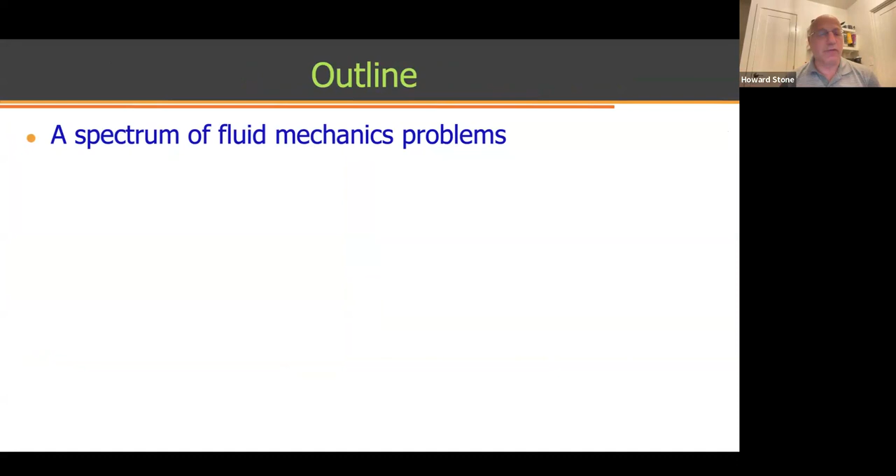So I'm going to tell you a few things about just glimpses at a couple fluid mechanics problems that we've worked on in recent years. Then I'm going to focus on some problems involving self-similarity, which is an idea I like as a sort of organizing principle to connect an experiment and a model. And at the end, if there's time, I'm going to show you a problem of surfactant spreading, which leads to an equation some of you might have seen called Burgers' equation. And again, we focused on a self-similar feature. So I'll kind of dance through some of these topics.

So to begin with, a couple fluid mechanics problems. I tell the story this way: when COVID hit in March 2020, we all went home. We were locked at home, and it turned out at about March 1st, 2020, a colleague from France had come to the United States to work with me. His name is Manu Abkarian. He's an expert on blood flow, an experimentalist.

Ten days after he arrived, he was isolated at home in Princeton with his family. And we started to talk every day. We were talking about all the reports of people getting sick in public places. And we got interested in this idea of airborne transmission. Now we know a lot about this, of course, we've all heard a lot about it.

And of course, in the fluid mechanics world, there's been a lot of work on droplets. I'm not going to say anything about droplets. I'm just going to ask the question: when you speak to someone, how much of what you speak travels far enough to cover their head if you were sitting near someone? We got permission when the university was closed to go back to the lab, and Manu in the lab started to image what happens when you speak.

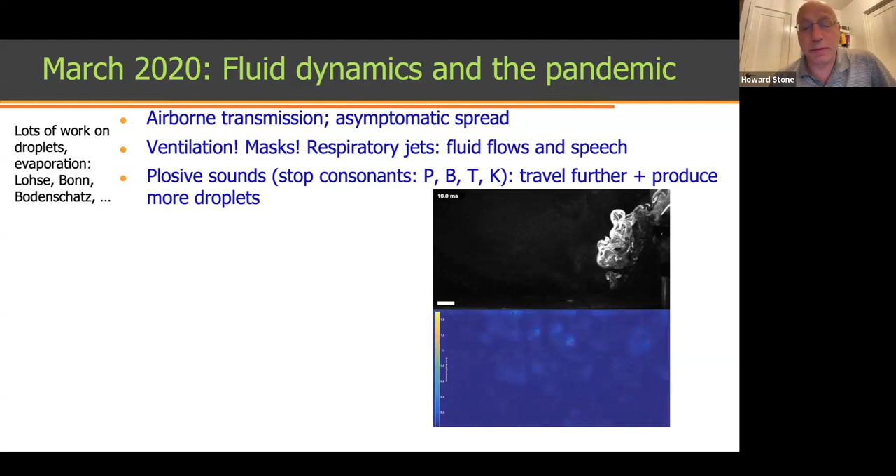You might find this interesting: the World Health Organization's social distancing guideline for more than a year was one meter. In the United States, it was 2 meters. So we ended up doing lots of studies of this, including some numerical simulations.

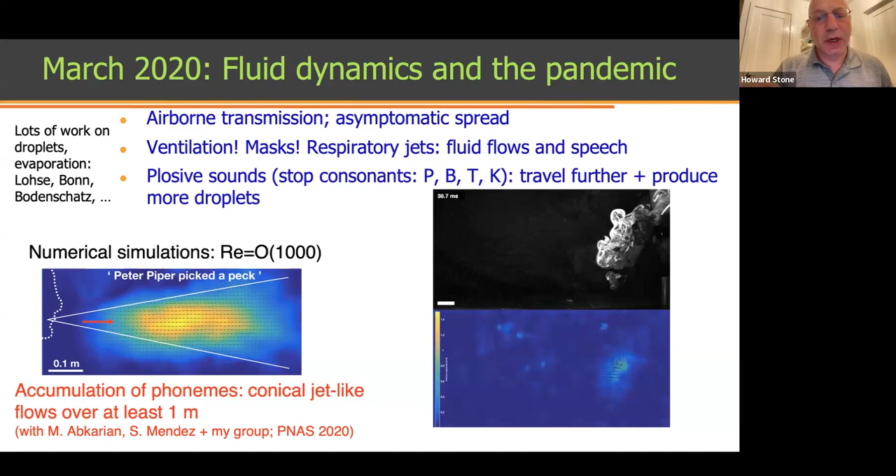We wrote a few papers on this. We also wrote about masks, not again about droplets, but about how masks change the so-called respiratory jets. And then in recent years, we've been trying to study more about the connection of fluid mechanics and speech.

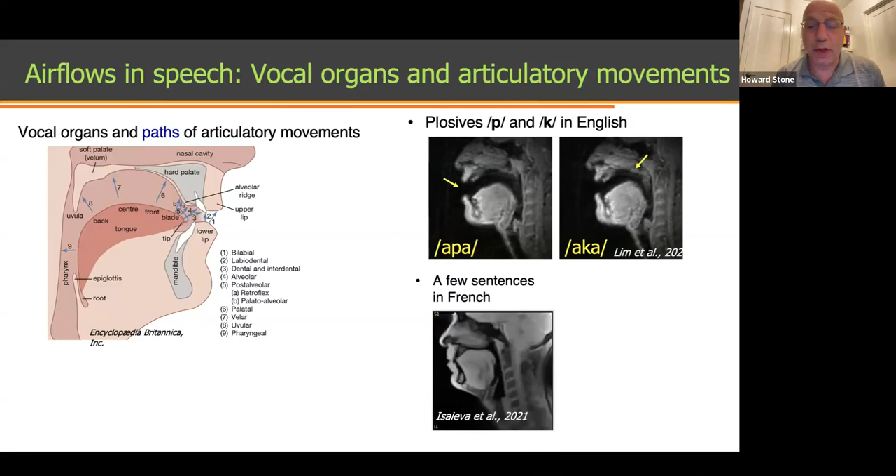In other words, how you make sounds and the airflows associated with them. In order to do this, we've looked at MRI images that show you how your tongue, jaw, lips and teeth move to control the cavity that's available for the airflow. We have looked at this. You can find this in different languages.

Because when the air leaves your mouth, your lips and teeth are like the orifice of a pipe, we've tried to understand how that changes the restrictions of the flow. The consequence of this is we tried to make a fluid mechanics-like model that links the features of language to the airflows you create in front of you, the respiratory jets.

If you're all listening, just try to do this: say the sound P, and you'll notice that when you say it, your lips are shut momentarily. What that's doing is, as you try to speak, you close your mouth, the pressure builds up in your oral cavity, and then when you open your lips, you get a very strong airflow.

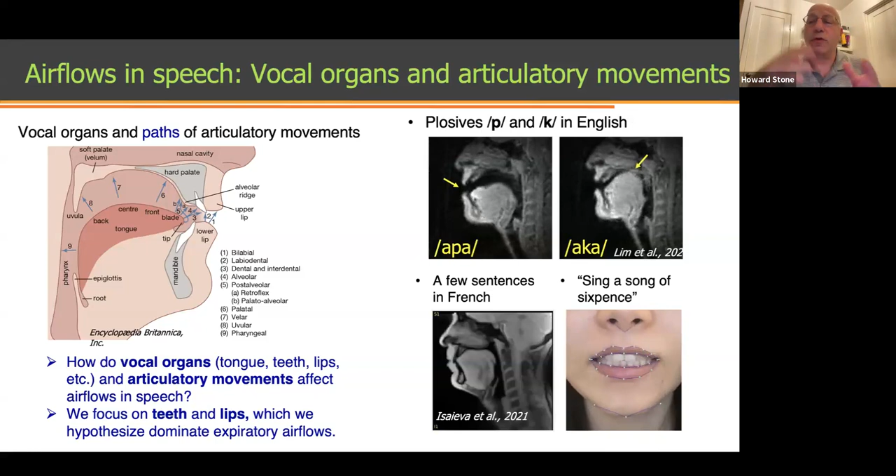So there are fluid mechanical features associated with this, and we've now coupled this to a Navier-Stokes solver. If you look in the lower right, we have a model of your teeth and lips moving. That's the cavity, that's the orifice of the cavity.

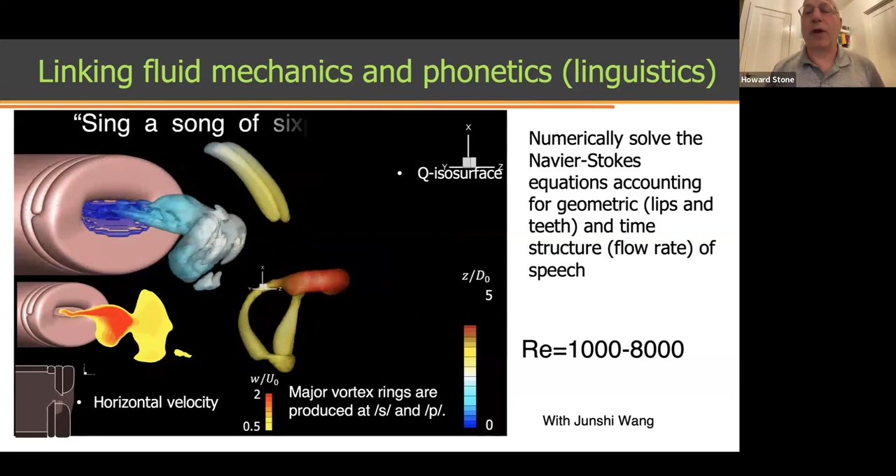We measure the airflow experimentally in the lab associated with different phrases, and then we couple the airflow as the input to a Navier-Stokes solver, color-coded here by speed and vorticity. You can see the kind of features we're now trying to understand, to link fluid mechanics to the air around you during an ordinary conversation.

After a couple of years, we're now trying to draft a paper that tells this fluid mechanics story. Anyways, I thought you might be interested if you hadn't seen that yet.

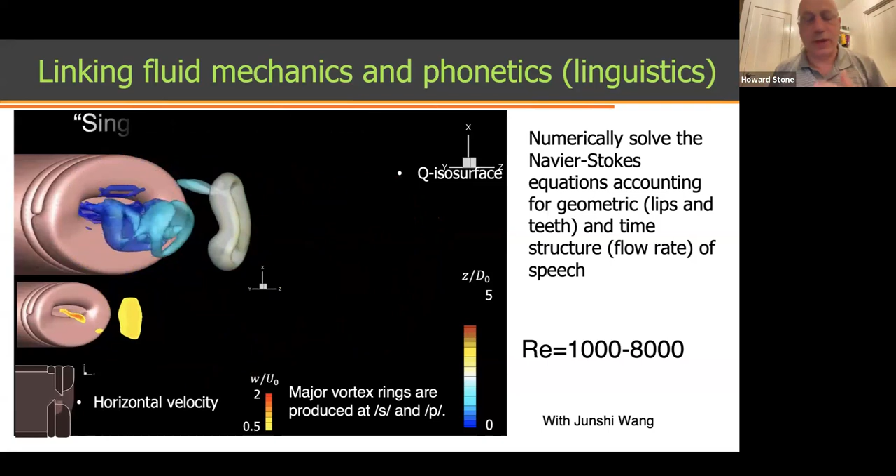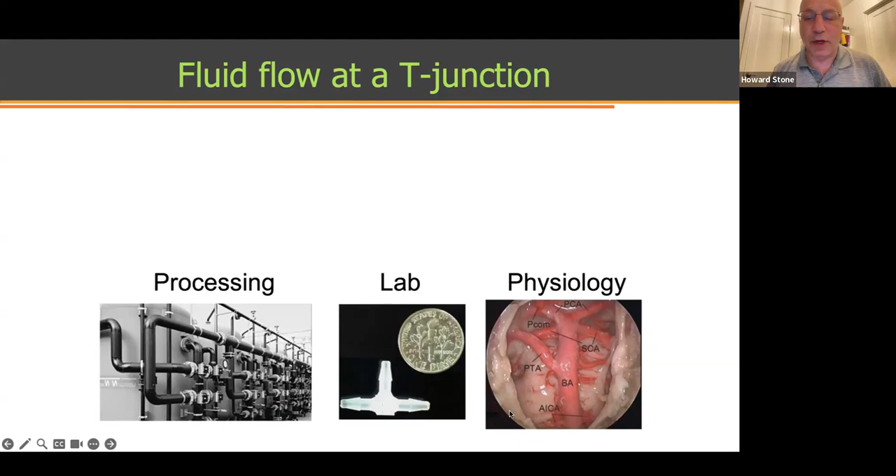So this is a fluid flow at a T-junction. At the bottom of the slide you can see different cases of a T-like shape of a pipe, whether in industrial processing, a laboratory device, or in physiology. There's lots of connectivity. I'm going to tell you about a problem where the flow comes in at the top of the T and goes out at the sides.

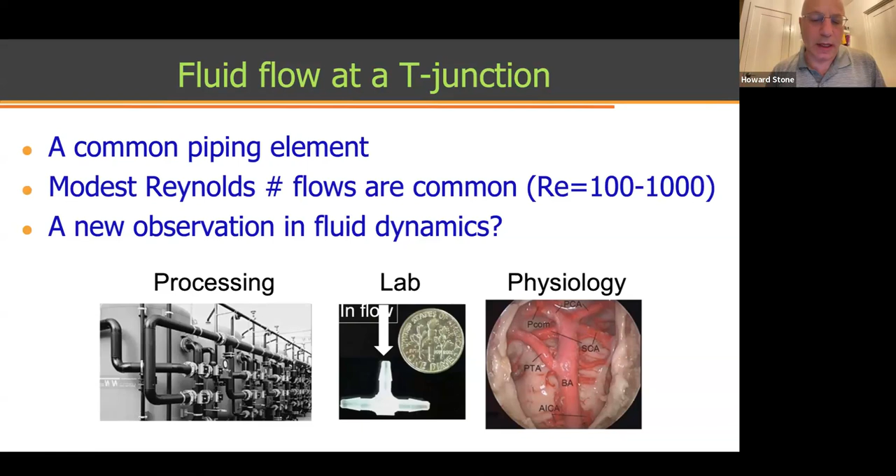The problem I'm going to tell you about has a modest Reynolds number, typically of the order of a few hundred to a few thousand. So inertia dominates, but it's not completely turbulent flow. If you teach fluid mechanics, this is chapters 6 or 7 in an undergraduate textbook - flow in pipes. Flows like this have been studied experimentally and numerically for decades, both in industry and academics. To a first approximation, I'm going to suggest that everyone missed the most interesting thing about the flow.

Now, to give you an indication about the flow, this is the experimental configuration we were first studying. It's a T-like shape with flow in at the top and out at the sides. The Reynolds number is defined just like you'd ordinarily define it. If you do this kind of experiment and study small glass beads in a fluid like water, nothing terribly interesting happens.

I should say we were first doing this because a colleague was interested in how much energy a particle would hit the wall with, and whether it might damage an oxide layer on a pipe, for example.

But what you see is the particles come in at the top, they leave at the sides. They typically overshoot streamlines because they have a different density than the fluid, and they have a somewhat complicated trajectory, but not too complicated.

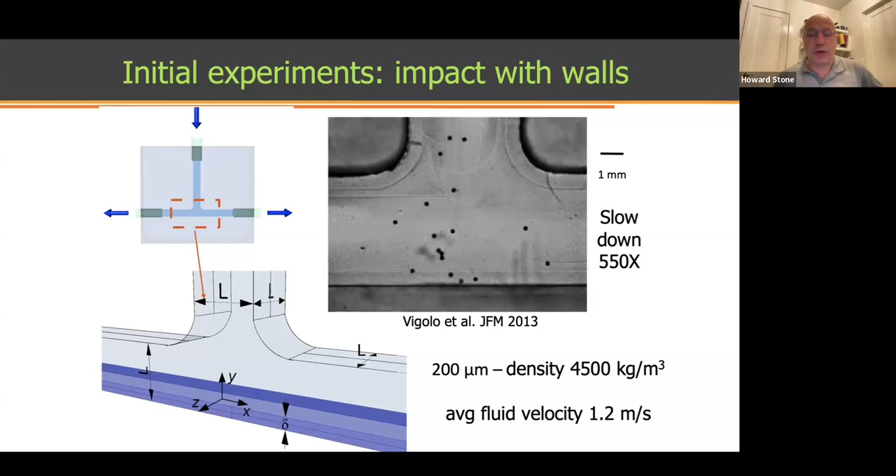And one day when we were doing this experiment, air got trapped in the flow. So I'm now going to show you what I believe had never been observed in the fluid mechanics literature before for this configuration. All the dots are gas bubbles.

They're obviously less dense than water. The orientation of the pipe, though, doesn't matter. Gravity plays no role in this effect, but density difference does. And in this case, the flow comes in at the top and out at the sides.

And when you film this with a high-speed video, what you'll start to observe is that bubbles are accumulating in the middle of the pipe.

If you ever tried to sketch this flow, and someone were to ask you, what do you think the streamline structure is? Are the streamlines a stable or an unstable kind of configuration from the standpoint of nonlinear dynamics? Most people would say, well, since everything is going away from the middle, shouldn't the middle be an unstable stagnation point?

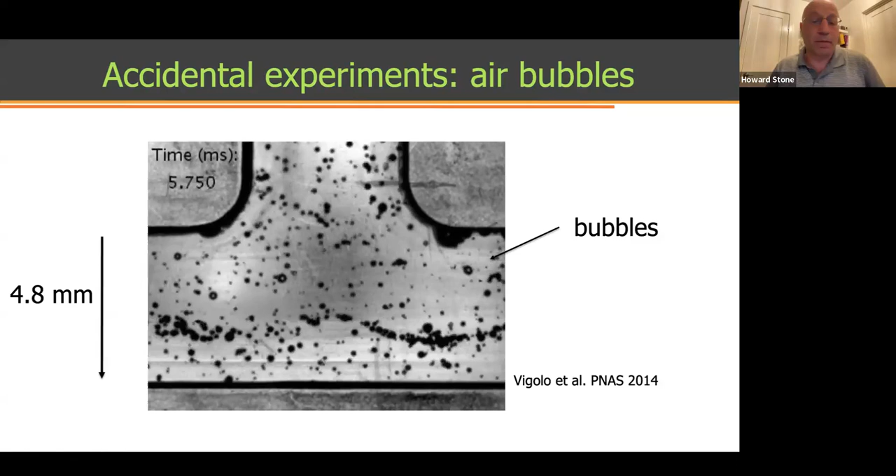That's a reasonable thought, but you can see in the experiment, at least when the Reynolds number, which here is a few hundred, I think around 500, something's causing the bubbles to accumulate. So that's the story I'm now going to briefly tell you about, which we studied experimentally and numerically.

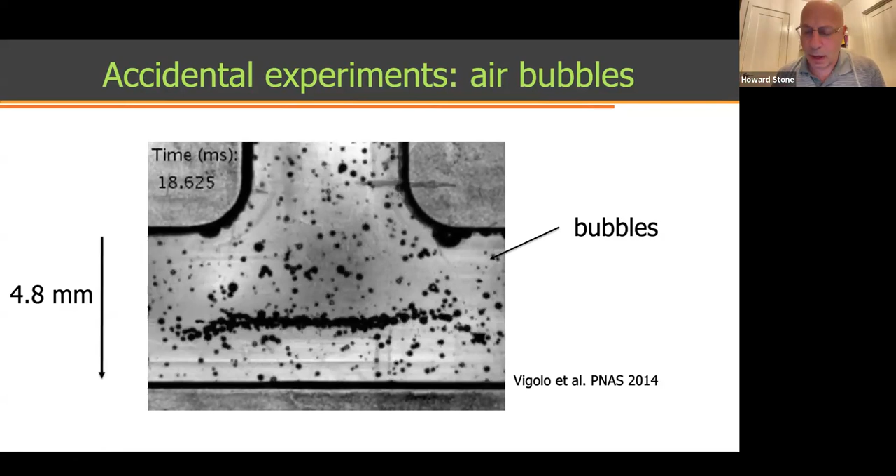If you're familiar with what's called the Dean flow, or a Gortler-like flow, when the flow has to turn a corner, it starts to generate vorticity, so the streamlines start to curve. And they get progressively more complicated as the Reynolds number increases.

Okay, so now you can explain one thing about the movie I just showed. Because you have vorticity, if you study turbulence, you know that bubbles go to the center of vortex lines. So you could imagine that if there were bubbles in this flow and you're generating vorticity, the bubbles would go to the middle.

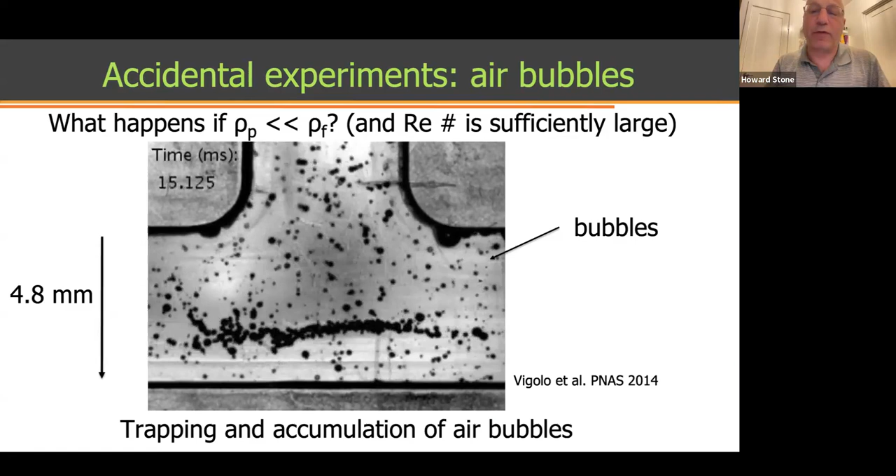So the bubbles are getting trapped in a vortex, but what's the thing that's keeping them from leaving? Why are they getting confined to the middle? That feature is because at a critical Reynolds number in this flow, the flow changes its topology like this.

In this flow, for a 90-degree angle and a square cross-section at a Reynolds number of 590, if you were to try to trace a streamline, what you discover is there's an internal stagnation point. So the flow is coming, the streamline is spinning to go out like a vortex. It reaches a finite position where the velocity is zero, and then it comes running back down the middle.

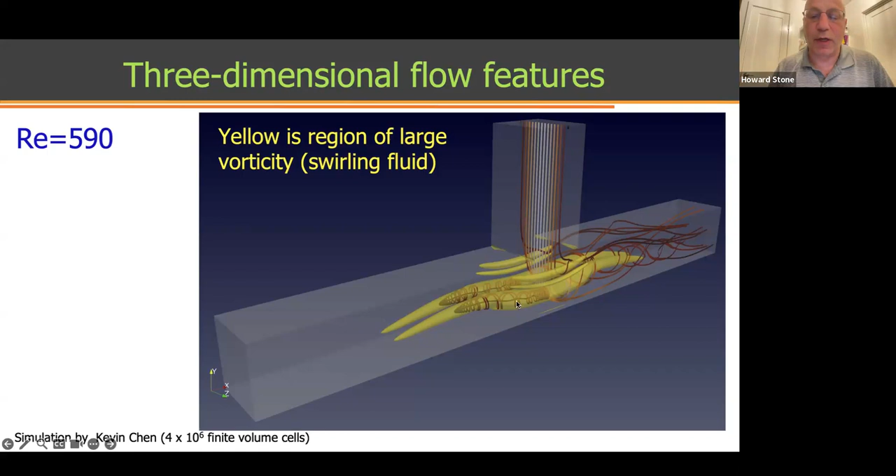In fluid mechanical terms, this feature is called vortex breakdown, and the region of trapped flow is called a vortex breakdown bubble. I could say more about how we stumbled on this, but effectively, this region of trapped streamlines is the region why bubbles are getting trapped and confined to the center of the pipe.

So long as the Reynolds number exceeds this critical number, and I believe we had kind of stumbled on this idea that you can have vortex breakdown phenomena in these confined configurations.

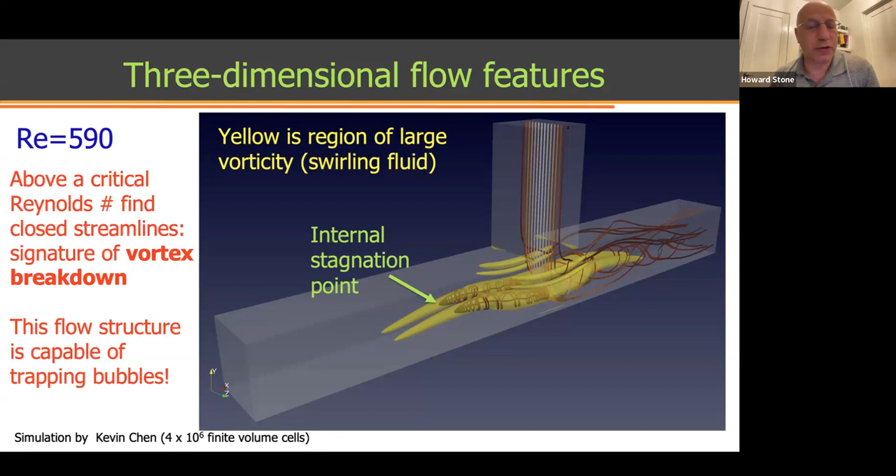To illustrate this streamline structure, I'll show you a video. We got lucky one day, and here you can see the bubbles coming in at the top. They're going out at the sides. You can see them spinning around and going out on the outside, and then you can see them running back the middle.

So this illustrates this three-dimensional flow with this vortex breakdown phenomena inside a pipe with a pretty modest Reynolds number. When the flow gets more complicated, we still see some structures of it, but the turbulence would eventually ruin it.

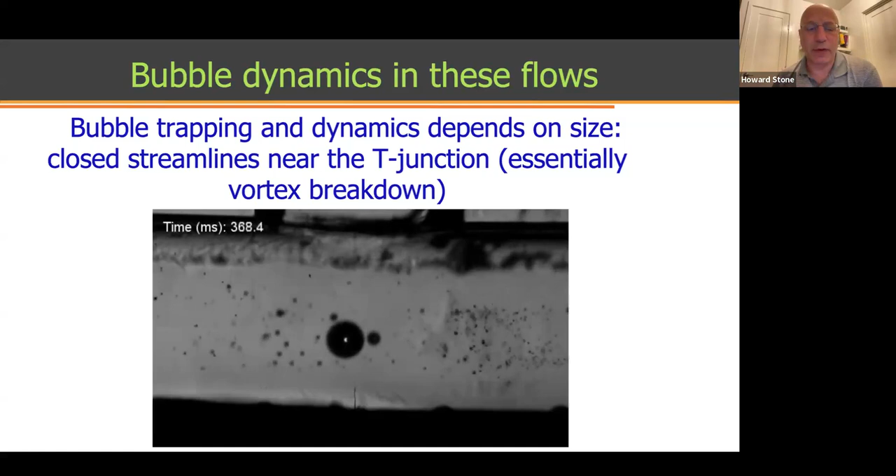Okay, so if you're paying attention, I can now ask you a quiz. Suppose I give you this geometry, but it's filled with dirty water, and I want to turn on clean water and clean out the pipe. You ask yourself, or your students, how long does it take when you turn on the pipe to clean the flow?

So anyways, we've written a number of papers on this. I freely say in public, I was never able to get a grant. I tried for four years, and I eventually turned to something else. But I always found this problem interesting, and so I like to share it with people.

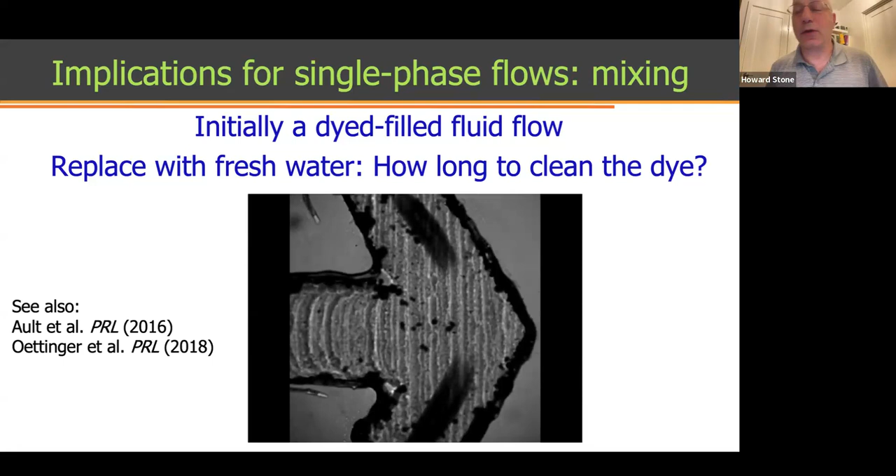Are we doing okay, Azada, Aman? Is it okay so far? Okay, no, well, at least you guys aren't asleep yet. So, okay, we're doing okay, maybe.

Okay, so the main part of the talk is I want to tell you something involving self-similarity. When you teach fluid mechanics, of course, you teach self-similarity, but you teach it in sort of model problems. So I'm going to show you how it comes up in some research problems. The first one I'm going to show you was work I did with my graduate student, Katie Wu, and Camille Duprat, who's a professor at École Polytechnique in Paris. And the paper just appeared.

If you were to ask someone, how do you think about self-similarity, if you just meet a person on the street, you might show them similar triangles and try to focus on the geometric similarity of objects.

But in fluid mechanics, the way we generally run across it, or in heat transfer, is we describe some kind of diffusion problem. Here I've just sketched, you have some concentration C, you're solving a linear diffusion equation. You imagine the concentration being some specified number C naught, say at a wall, and then it's going to diffuse into a domain with no chemical.

If I were to teach this before I did any math, I would make the sketch on the left, which is to sketch the concentration profiles at different times. And of course, self-similarity then is the idea that all these different solution curves at different times collapse to one universal curve if you plot x divided by the square root of time, or square root of dt, where d is a diffusion constant. This is the kind of thing that you teach, or you took in class when you were a student. And it has the feature that you started with a math problem with two independent variables, x and t. Self-similarity is essentially taking the so-called partial differential equation problem and making it an ordinary differential equation problem. So the first example I'm going to show you is a problem just like this with two variables, but it's a little more complicated.

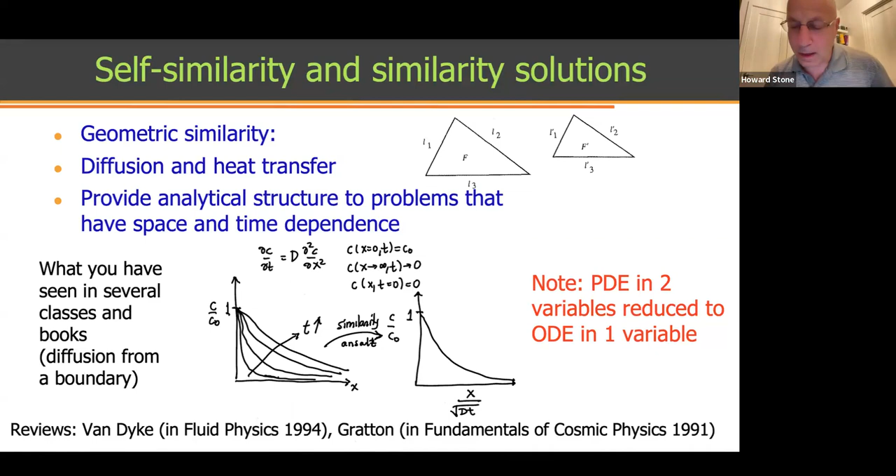Okay, so the way this comes up in fluid mechanics, and I'll show you how this comes up, at least in laminar fluid mechanics, and maybe there's examples in turbulence, is not just the linear diffusion equation, but diffusion-like equations. They involve two space derivatives on the right, but in the place of the diffusion coefficient, you can have a nonlinearity, like here, c cubed. I'm going to show you that this equation basically comes up in a large range of so-called thin film flows.

Now, if you have a diffusion-like equation, even a nonlinear one, they often allow similarity solutions. By similarity solutions, I mean that the function you're looking for is time to a power, alpha, times some function, capital C, of a ratio of two independent variables, x over t to the beta. That's sort of what you often teach.

That idea is useful if you can identify alpha and beta. Normally you need not only the equation but boundary conditions to do that. And if you succeed in this, the partial differential equation becomes a nonlinear ordinary differential equation, which you can normally solve quickly and numerically, so long as you have boundary conditions.

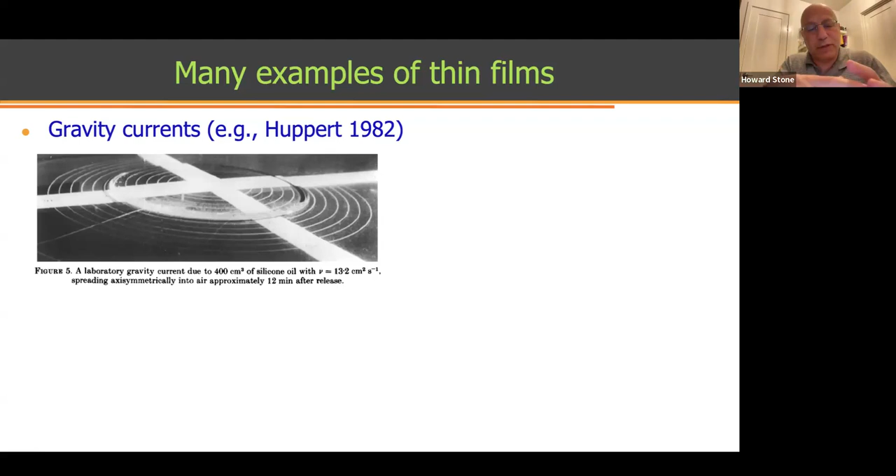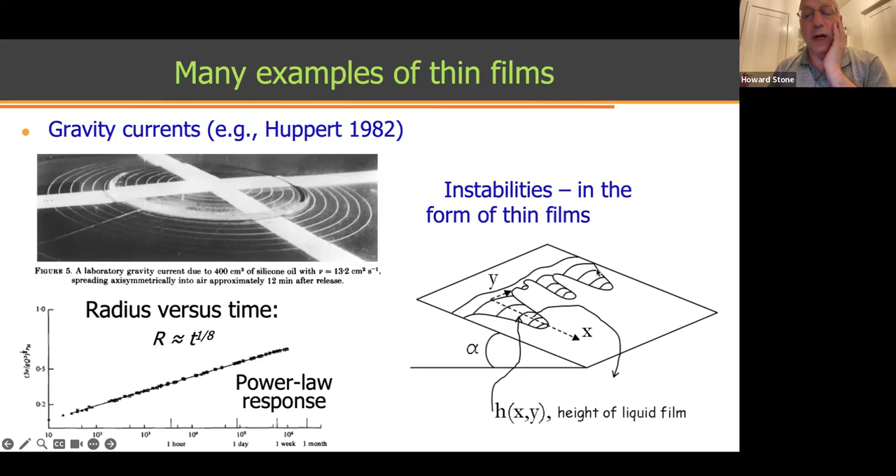There are many problems that involve thin films. They can be rivulets or whatever. So there's a wide range of examples where you see these thin film structures.

One problem I worked on a few years ago, which I liked—I didn't know much elasticity, and I wanted to learn something about it so I could do more fluid structure interaction problems. So we coupled this idea of a thin film with the most famous solid mechanics problem, the bending of a beam. Here you can see a video playing where, when the fluid loads the beam, it bends.

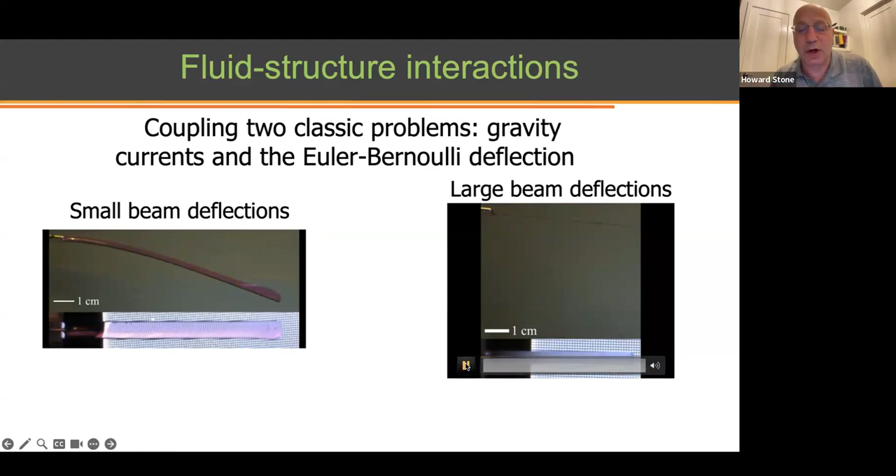There are two images here: a side view on top and a top view on the bottom. As the fluid flows, it's a so-called gravity current, like I just showed you, but its speed depends on the deflection of the beam, so these two problems are coupled. If the beam is very soft, the bending happens very rapidly, and there's a much stronger coupling of the fluid motion to the bending of the beam.

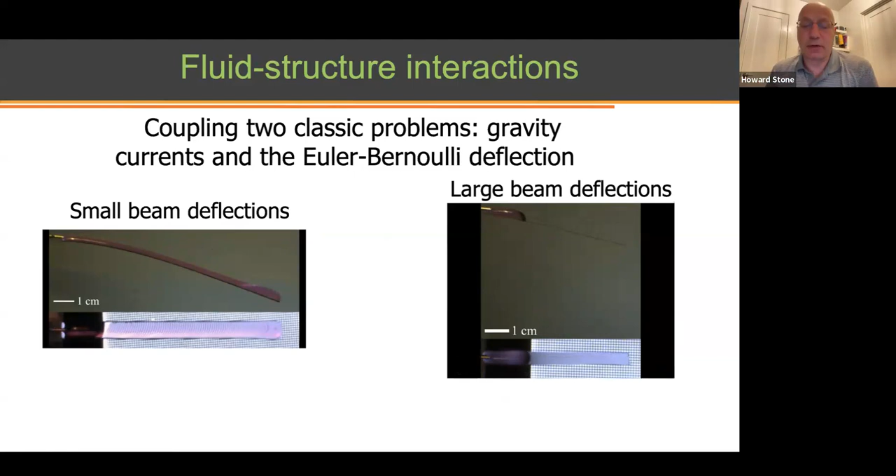I worked on this with my postdoc, Hyung-Soo Kim, and Peter Howell in Oxford then did a very beautiful analysis coupling these two problems together in a very elegant way.

So why do the Navier-Stokes equations lead to a structure you can analyze analytically? I'm going to try to show you that here. For this audience I don't have to explain the Navier-Stokes equations—I'm using U for velocity, rho for density, mu for viscosity.

Of course you could try to solve these problems numerically, but many thin film problems are moving boundary problems, so they're changing shape and might not be so simple. But when a film is thin—meaning if h is the shape function, its gradient is a small number—the shape changes, but only slowly along the flow direction.

When that's true, you don't solve the continuity equation in its normal form. You solve it almost like you do in gas dynamics, writing it as a conservation law for the height. This is an asymptotically exact description of the continuity equation, where I'm using the divergence with the perpendicular symbol to just measure variations along the flow.

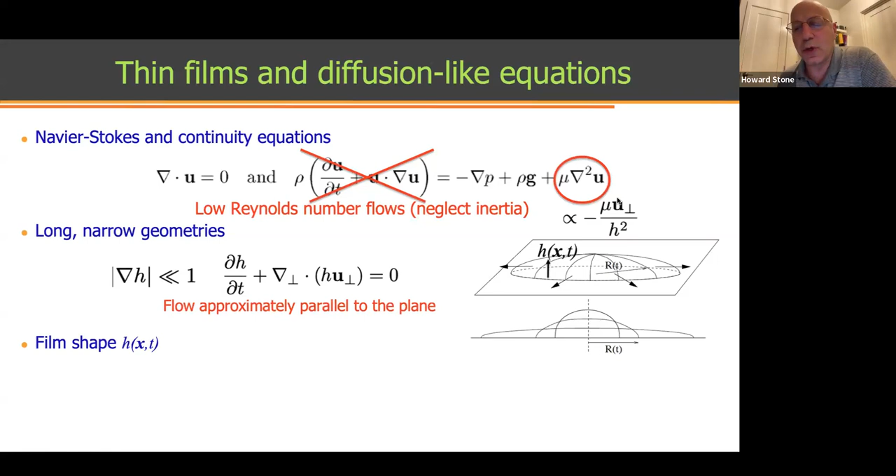This continuity equation, or volume conservation equation, couples the height to the velocity. How do you get the velocity? You turn to the Navier-Stokes equations. Since the film is thin and often viscous fluids move slowly, you assume the Reynolds number is low, so you neglect inertia, and then use what's called Darcy's law—replacing the viscous term by one proportional to the local velocity divided by the height squared. As soon as you do that, you can integrate this equation to get the pressure and apply boundary conditions.

When you take this velocity field and substitute it into the continuity equation, after a couple steps involving integrating for the pressure, you get the equation shown at the bottom. You can recognize the continuity equation in it—there's a d by dt on the left where my pointer is, and a divergence of a whole bunch of stuff on the right, which is the mass flux or volume flux.

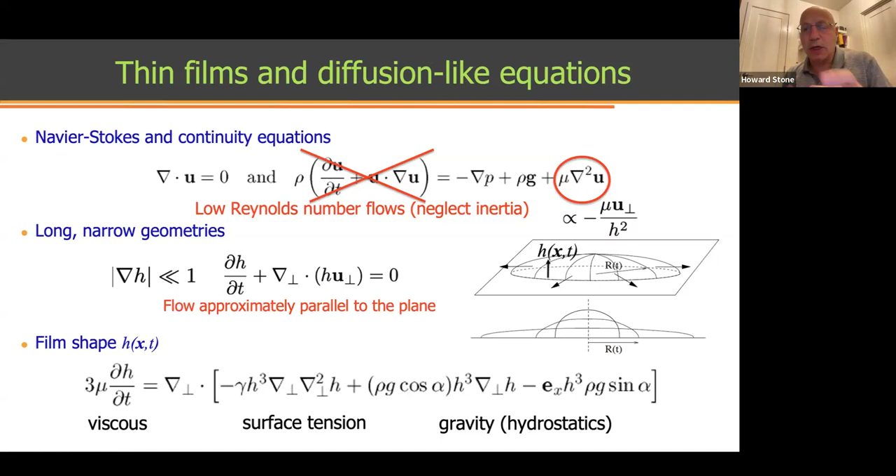The equation involves the viscosity, and in problems that have a film to them, there's gravity that enters two terms. It enters two terms because you can have a film spreading on a horizontal plane, or you can incline the plane and get a component of gravity along the plane. Those are the two gravity terms. And because the film is curved, you have a surface tension term.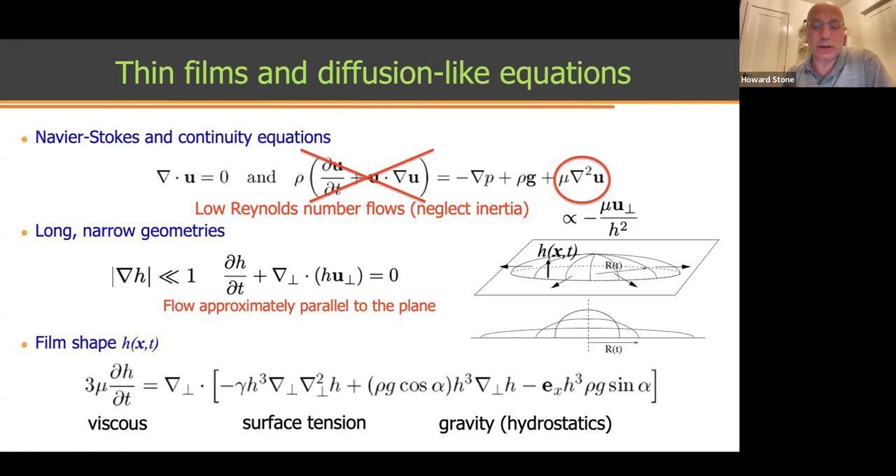And you notice it's a scalar PDE. There's one unknown, the height. That's the only thing now you have left to solve for. But it's nonlinear—it has this h cubed sitting over here like a diffusion coefficient. It has 4 derivatives where it has surface tension, and 2 derivatives where it has gravity. So it's still complicated, but it's now only a scalar equation, not coupled nonlinear PDEs. It's one nonlinear, in this case, fourth order PDE. Maybe that's helpful for you to see why this is such a useful thing. It has many different features to it.

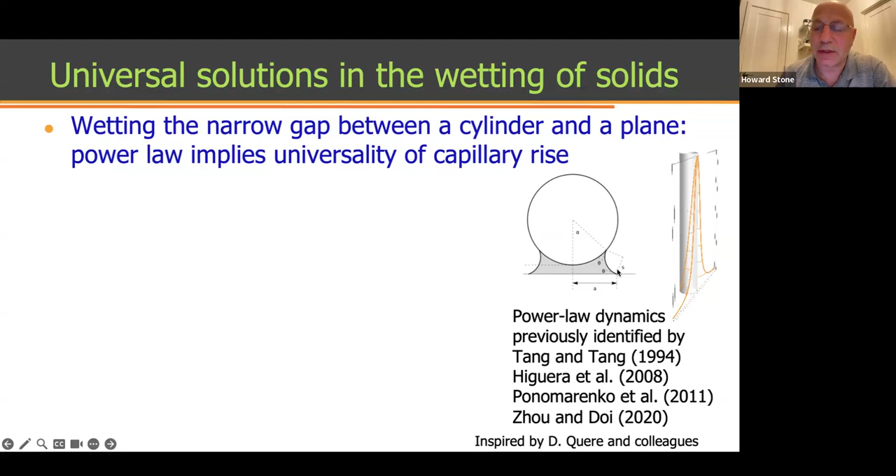Okay, so the problem we were interested in is shown on the right. If you take a cylinder and push it up against the plane, as you see on the right, we're then going to place a small amount of fluid at the bottom. And if the fluid wets the surface, what it does is it climbs up the narrow wedge between the cylinder and the plane. I've sketched that here in cross section. And so what you see when you do an experiment like this, when you look at it from the front, if you put a little fluorescent dyed liquid in the bottom, it's going to wet the plane, and it climbs up the narrow wedge between the cylinder and the plane.

And what was, I think, first pointed out in a paper by Tang and Tang, and then really documented beautifully in a paper from David Quéré's group, is that it turns out the fluid rises at a certain rate—that's a power law of time. In fact, it rises as t to the 1/3. And you might be surprised, but unless you put in some other physical effects, the theory will claim that it just keeps going up and rises higher and higher, though slower and slower, filling very narrow wedges. So this you'd call a power law, and I'll explain where the t to the 1/3 comes from.

But if you really want to see a beautiful argument, read the 2011 paper from David Quéré's group. And to a first approximation, there was not a complete analysis of this problem. There are variations of an analysis in the top 2 papers I mentioned, and a nice analysis using a PDE approach by Masao Doi and colleagues.

But the question we asked was, everyone described this problem as universal. And the universality they were saying was because it always looks like t to the 1/3. In fact, it doesn't matter what the shape of the cylinder is—if you use sort of a flattened cylinder, it still rises as t to the 1/3. So the suggestion was that this problem is universal. But the question we wanted to ask is the prefactor that comes into this—is it also universal? Does it know anything about geometry? So that's what I'm now going to show you, what we looked at experimentally and with a model.

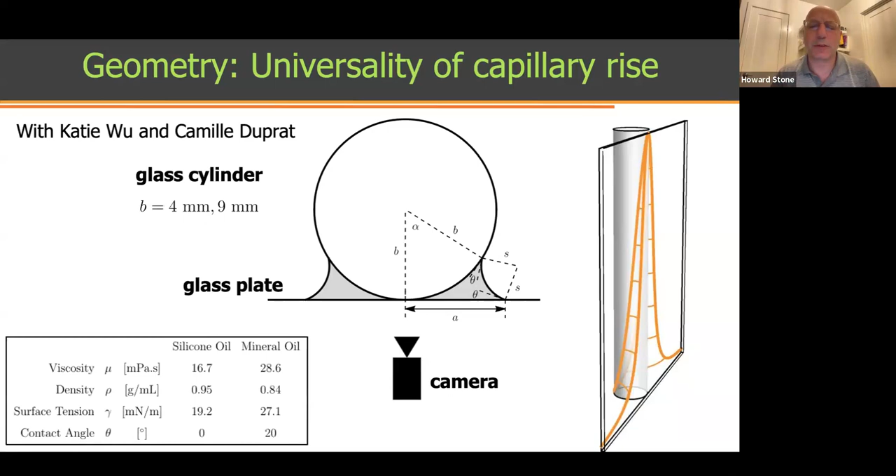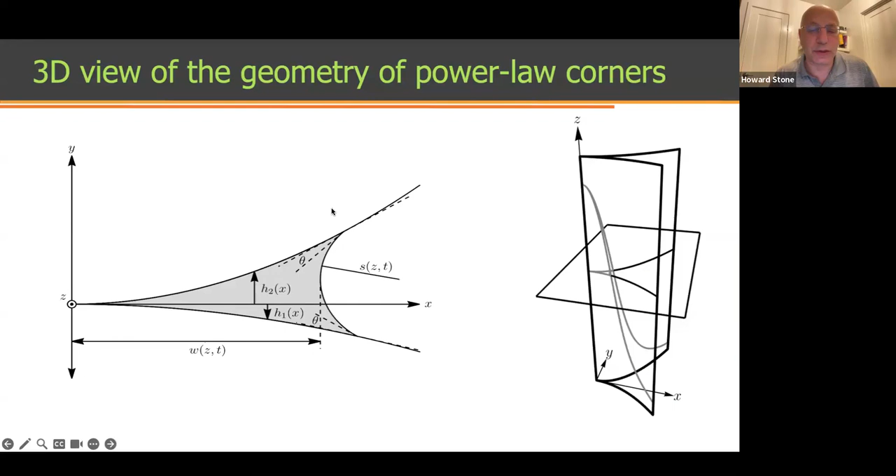Okay, so this is the geometry. It's a little—you have to think about it for a while. On the right, we want to describe how things are rising in the vertical direction, opposite gravity. And in the middle of the slide, we want to describe how the fluid is filling this wedge-shaped region between the cylinder and the plane. This wedge-shaped region has a radius of curvature we're going to call S. We did experiments with different radius cylinders, and experiments with different liquids. I'll compare those with the experiment we did, but there are other people who had also done these experiments. So there's sort of a 3-dimensional view of what you might see when you look in the wedge. And we're now going to describe the geometry either between a cylinder and a plane, or between 2 cylinders that might have different radii.

So what we're going to say is that if h is the vertical height of the width of this liquid section, it's a power law of the horizontal dimension because the wedge is narrow, so you can get away with that. Different geometries are characterized by this number n. If it's a cylinder near a plane, n would be 2. If it's a soft cylinder that you squeeze near a plane, n is 3/2. So n can take on different numbers.

The key parameter, which brings in the geometry of whatever you're set up in your experiment, is this number c. C has funny dimensions because it's tied to what you choose for n. But c is a characteristic, a geometric characteristic that tells you what the typical fluid profile is in this gap. Is that okay? Sort of?

The other number you need is the radius of curvature S that separates the liquid colored gray from the air outside. You can see that because the liquid is a wetting liquid, the meniscus is curved. So in this gray region, the pressure in the liquid is low. That's why the fluid is climbing higher, because it has a lower pressure than atmospheric pressure if the fluid's wetting.

Okay, so I showed you these kind of continuity-like equations. When you write this equation for the radius of curvature S that I showed you on the previous slide, with a time derivative and a derivative of a flux, you get an equation shown on the slide. The equation has two terms in this bracket: one comes from gravity because the column is going vertically, and one comes from surface tension. So this ds/dz is from surface tension. The funny powers of n are because we've allowed for a funny shape, height being x to the n.

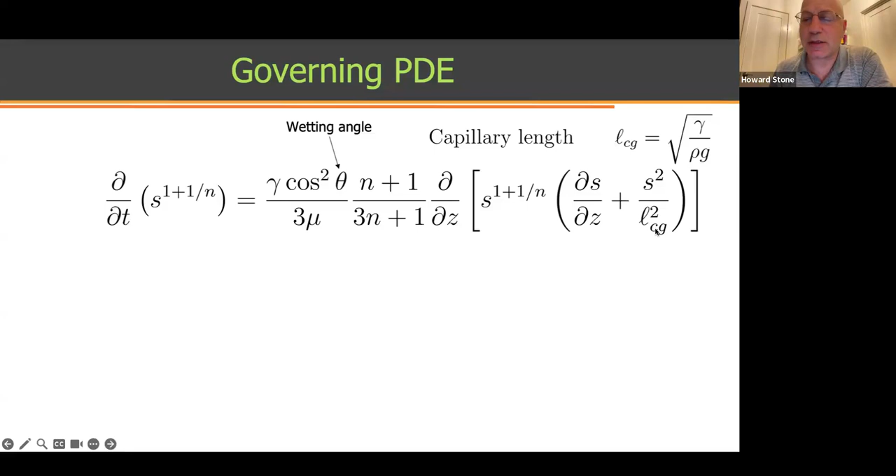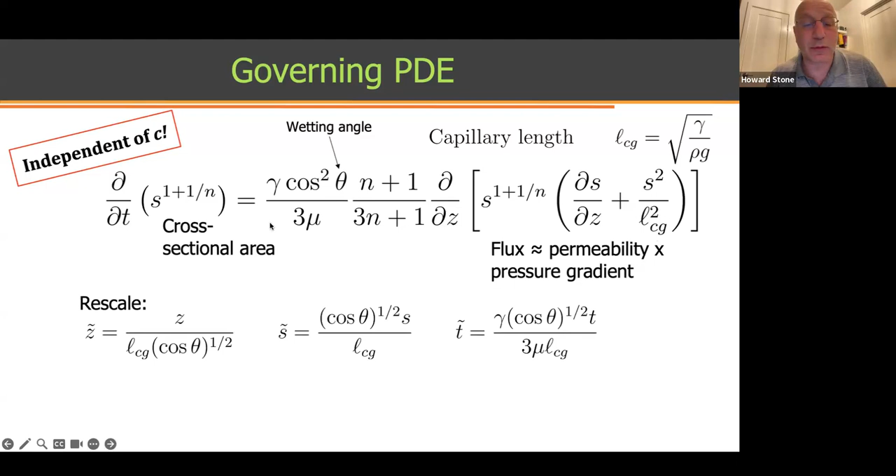Because there are dimensions here, I should say L_CG is the so-called capillary length. The first thing you should do is make this non-dimensional. So for this conservation equation, which is really a continuity equation, I should say the number C isn't anywhere here — the only role of geometry is n. When you make everything non-dimensional using a length scale, the so-called capillary length, and a time that comes from a convenient choice involving surface tension divided by viscosity and a length scale, it turns out that all the parameters disappear from this equation.

So if S tilde is a non-dimensional radius of curvature, all the parameters now are gone from this problem, and the only thing that tells you about geometry is the number n. This is the first hint that the solution to this problem simply cannot be universal, simply because you have to tell me n. Okay, so this nonlinear PDE, it turns out, has a similarity solution.

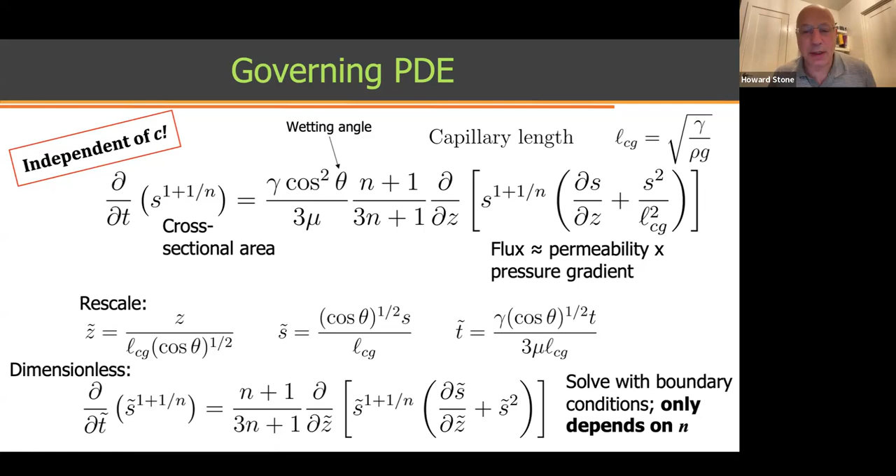That's not obvious, but it's true. A very nice physical argument was given by David Quéré. But if you look at this equation for a little while and balance the three terms — we're taught to balance different terms — if you balance these two on the right, you'd see that S varies as 1 over Z. And then if you balance the first term and the second term, you'd find out that Z cubed goes like T. The consequence of that is there's a similarity solution that says the radius of curvature S is time to the minus 1/3 times a function of a similarity variable.

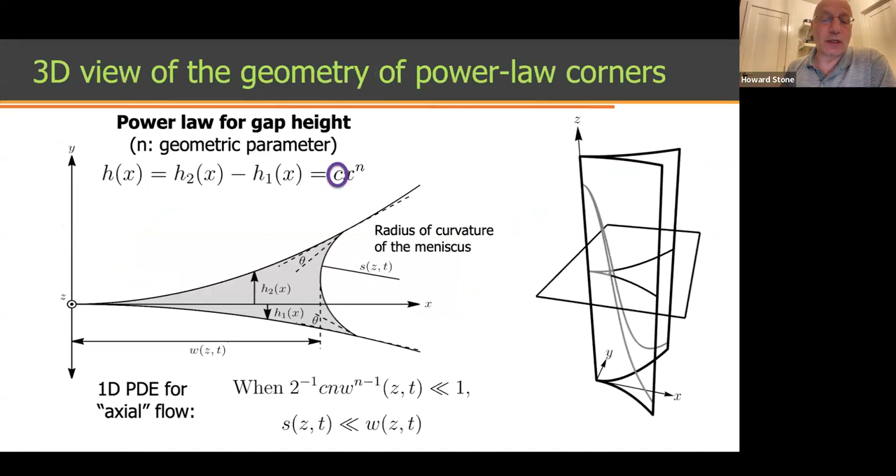Okay, so that's my first example of a similarity problem. Maybe I'll just remind you that what I tried to describe was this beautiful experimental image for how things happen when you're wetting narrow wedges.

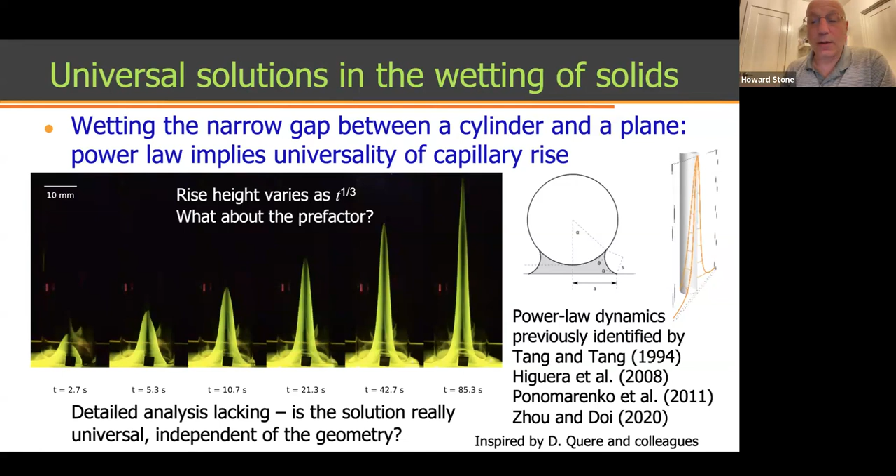Okay, Azada, Aman, that's okay? Sort of? Anybody there? Yes, yep, that's all right. Good. Well, you guys invited me, so you can always disinvite me, I suppose.

Okay, so this other problem is one I also very much like. It's a little different, but maybe you'll find it interesting because it starts with an experiment that other people might have done, but they hadn't noticed, and it ends with a similarity solution.

So I showed you this slide already, which is what you see when you teach or take classes where people introduce the idea of self-similarity to you. I'm now going to ask not about equations or physical problems that have two independent variables, x and t.

I'm going to ask, what if there are three variables? And the question is, is it possible that you can find a similarity solution, a non-trivial similarity solution? If you could, then you'd only have an ordinary differential equation. I'm searching for examples of this. I'm going to show you one that begins with an experiment.

And that problem goes like this. You take a plane, you put some fluid on it, and you watch the fluid drain. In this kind of problem, you imagine that the top point, which is a so-called contact line, is fixed. And when the fluid drains, it just gets thinner and thinner. This is a problem where the film height h varies with vertical distance x and time.

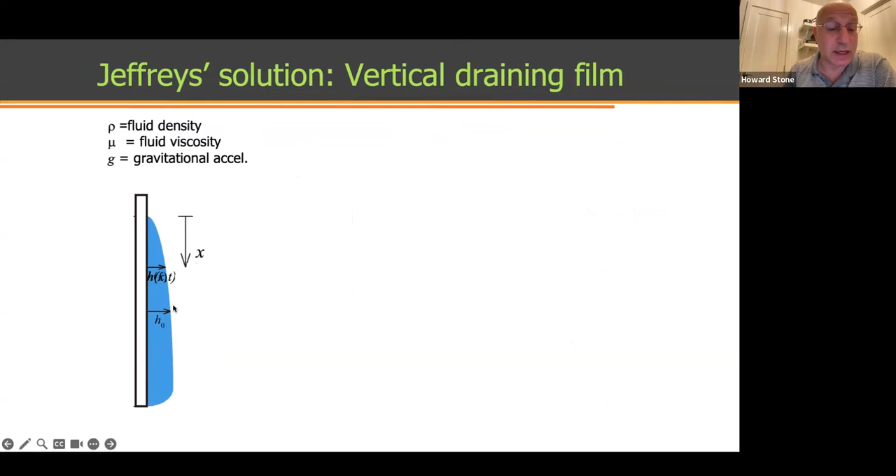So it really is described by a fluid mechanics problem, and it was first studied 90 years ago by this man, Harold Jeffreys, who wrote down a variant of the equation I showed you before. There's a dH/dt term, and because the film is vertical, if you ignore surface tension, the gravity term has this feature.

Now, if you took a math class and someone told you that you had a first order nonlinear partial differential equation, they would teach you how to solve this problem by the method of characteristics. What I'm going to just show you is that the scaling idea, if you allow yourself to be a little sloppy, you can solve this equation with algebra.

And the way you do that is forget the derivatives and just write the first term as h divided by t, and the other term as h cubed divided by x. If you do that and then cancel an h, you see that h squared is proportional to x divided by t. And in fact, that's an exact solution to this problem.

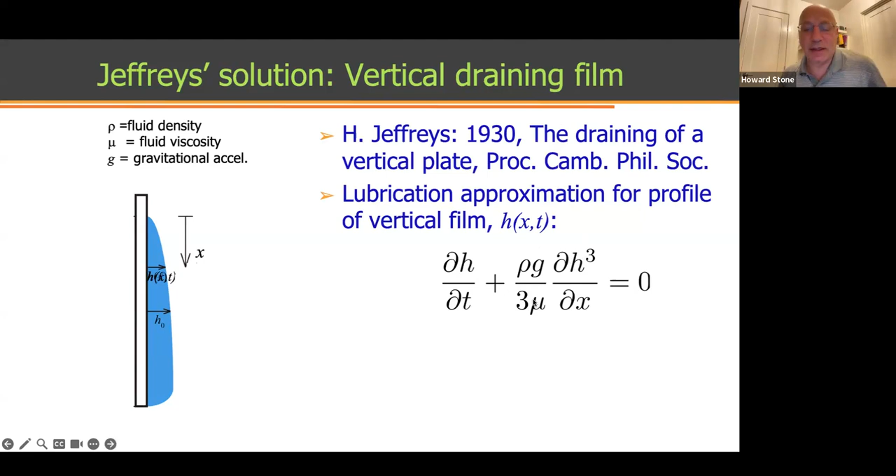As Jeffreys pointed out, this ratio of the square root of x divided by t, and I put in the right physical factors that come from the equation, this is an exact solution to this differential equation. It won't satisfy initial conditions, but it satisfies the equation.

And it says that for any fixed position x, as time goes forward, the film should get thinner and thinner as time runs forward, as you're draining fluid. Okay, this is the Jeffreys problem.

Here's an experiment that shows this feature. You take a glass slide in the lab, you wet it with dyed water, and you hold it vertically and you watch it drain. And what you see is that the dye color gets less and less as you lose fluid.

If I were to ask you what the most interesting feature is, someone has to answer this question, by the way. What's the most interesting feature you see in this experiment? What would you say?

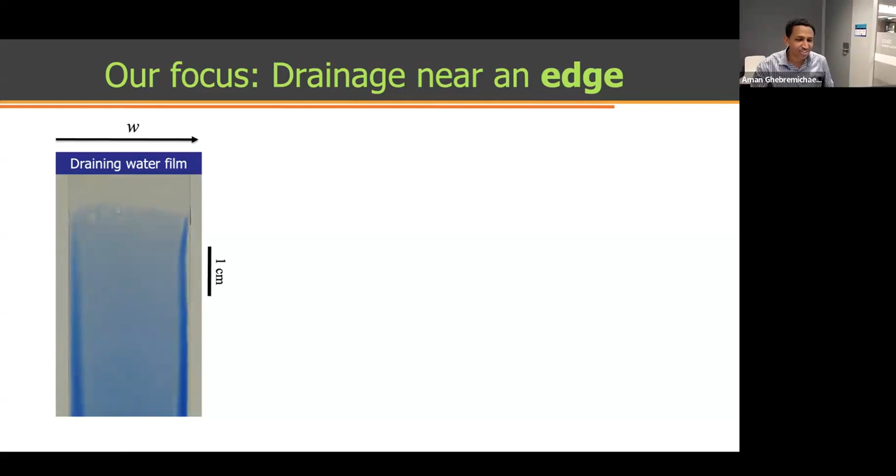The intensity on the sides, maybe? Yeah, it's a feature of the sides. There's an edge effect. That edge effect I'm going to show you is effectively a boundary layer, just like we study in fluid mechanics.

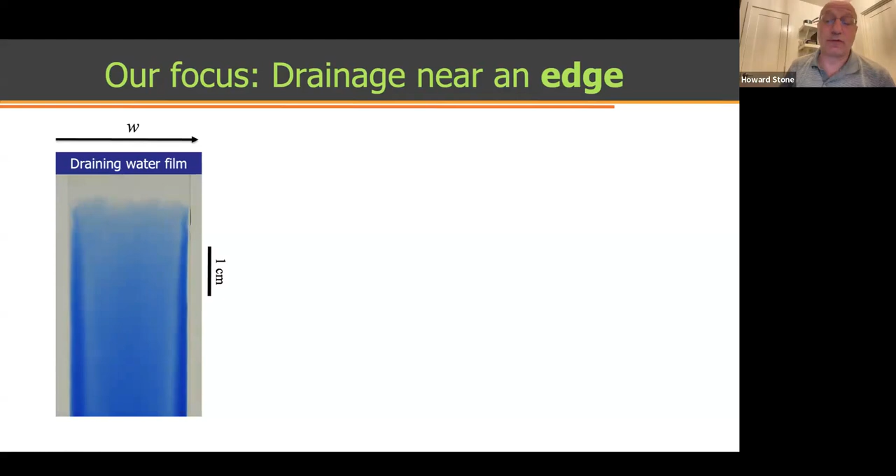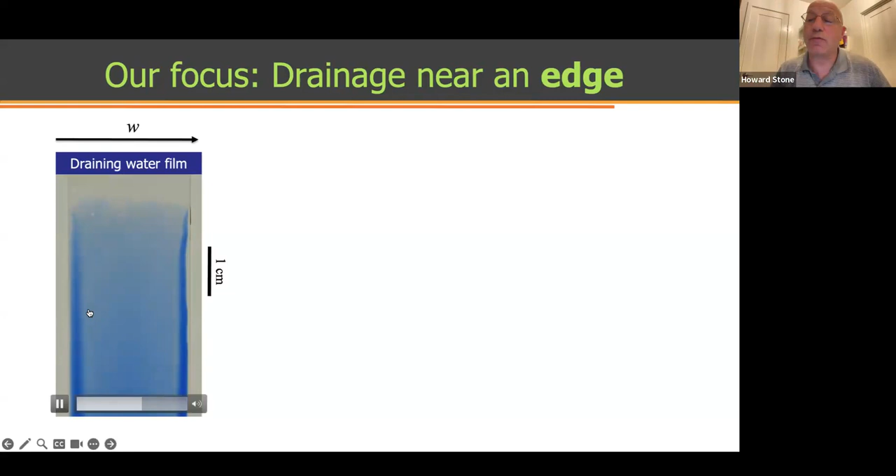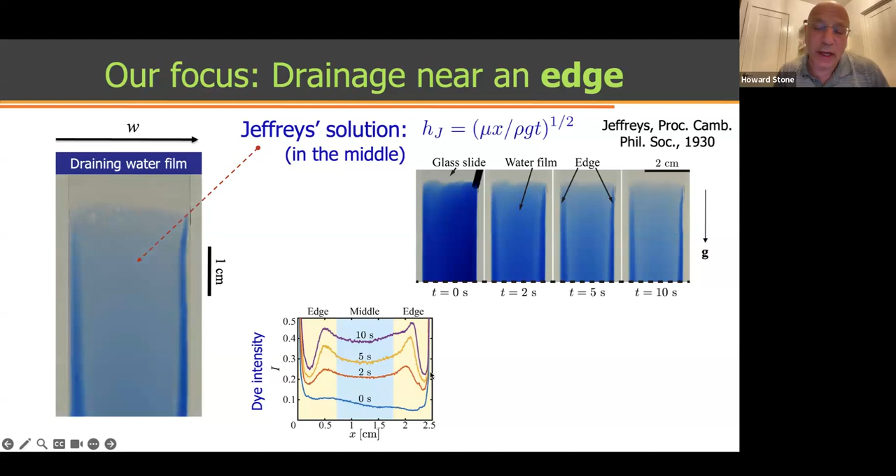But to a first approximation, for 90 years, the fluid mechanics community has only studied the middle of the film, because Jeffreys studied a uniform film. So if you look only in the middle of the film, that's the problem Jeffreys studied. In the middle, the film is uniform and just getting thinner. But near the edges, there's a more complicated shape.

Jeffreys claims that the solution should follow the similarity solution shown at the top. So if you take the film height and scale it by the Jeffreys solution, these curves become a universal curve. That's the idea of self-similarity again, that things can be self-similar.

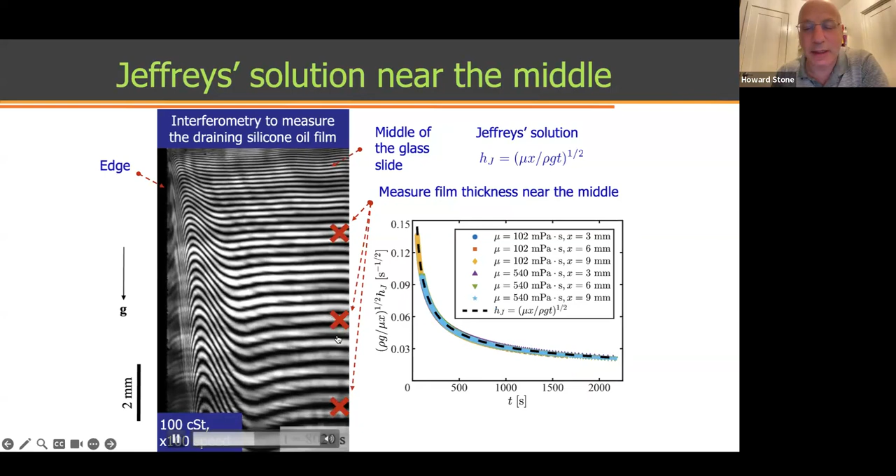But now I'm not interested in the middle of the film. You're going to say, that's boring, what about the edge of the film? So let's look at the edge of the film.

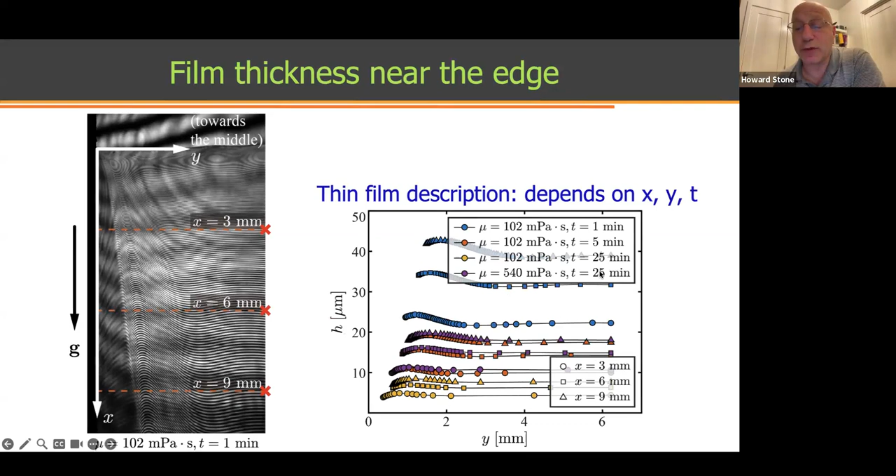Now we're going to pick 2 different X's, so now there are 3 curves. Then we're going to change the fluid viscosity and make measurements at different times. So now we have data for 2 different viscosities, 3 different times, 3 different X's. There are 12 curves on this graph. The question we asked is, are these curves related? Do they have something about them that is always the same? That's what I'm going to show you now, that these curves in fact have something in common.

What's unusual about this is, of course, there's surface tension, gravity, density, viscosity, but there's also film height versus the horizontal distance, the vertical distance, and time. So there are 3 independent variables, X, Y, and T, and 3 physical variables: viscosity, density, surface tension. If you only knew this one equation that came from thin film hydrodynamics—and I'm not sure there's something exactly like it in turbulence, but you can imagine there might be if they're thin regions.

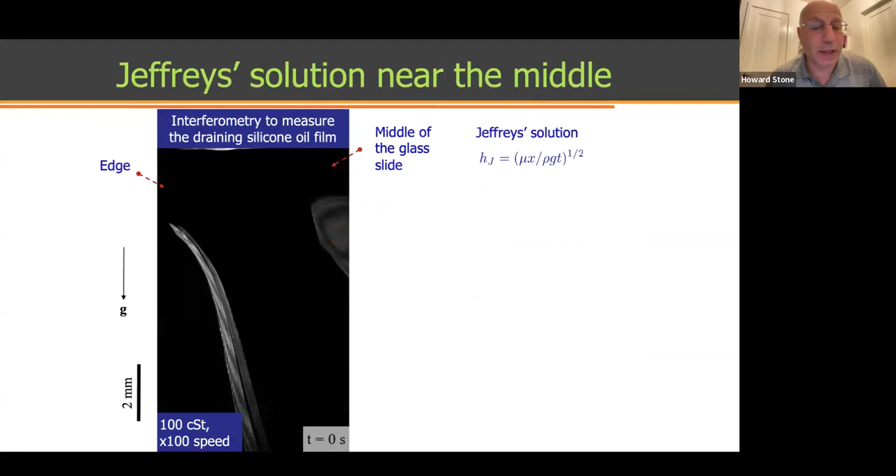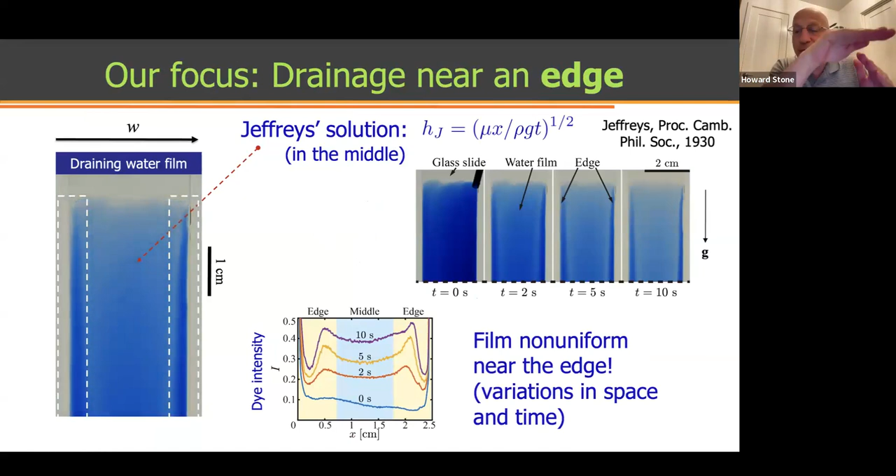The first thing you say is what Aman said before: the edge is sort of like a boundary layer. If you look back at this movie—I'm probably not going to do the last part—if you look back at this movie, the edges are like boundary layers, and the boundary layer is in the horizontal dimension. It's narrow in the Y direction. So you take this equation and you look at the highest derivative term.

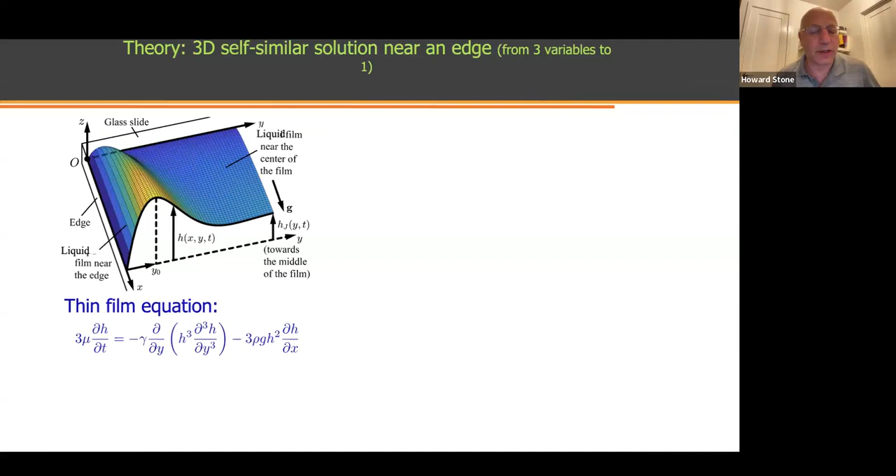You first say it's a vertical plate, so you get rid of one of the gravity terms. Then you look at the highest derivative term, and you say the only derivative that matters is not both X and Y—you don't care about the vertical. The boundary layer is changing quickly in the Y direction, so you replace the derivatives by only the Y derivatives. This other term, you only keep in the gravity direction, so it's only in the X direction. So when you have this kind of shape and you study the thin film equation, you get an equation with the feature I showed you before: a viscous term on the left, a surface tension term as the second term, and a gravity drainage term.

The first and the last are what are called the Jeffreys problem. That's what I already showed you. This other term brings in the edge, as a boundary layer. This is a terrible equation, right?

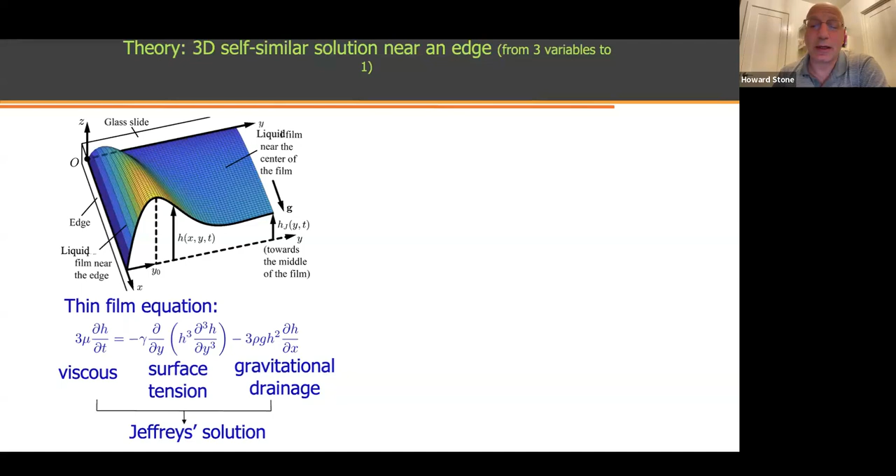It's got nonlinear terms everywhere. It's got 4 derivatives, 3 independent variables. And the miracle is there's an exact solution to this problem. That's the miracle, and I could show you how you think about it. But the miracle is you think about it almost like you do the Blasius boundary layer.

You say, I'm going to look for a solution H, and make it look like what happens far away. Far away, you have the Jeffreys solution, which is x over square root of t. And then I'm going to look for a function of a similarity variable where the similarity variable involves x, t, and y. And you need to define these coefficients.

By substituting into the PDE, you can find the coefficients exactly. It has this crazy form that involves t to the 1/8, y, x divided by x to the 3/8. It involves all the physical variables. And this nonlinear PDE becomes an ODE, which you can solve numerically.

This similarity variable, I'm now going to use to show you how well it does in comparing with the experiment. And I could talk later about how, by balancing arguments that you sometimes do in class when you make order of magnitude balancing, you could identify this term.

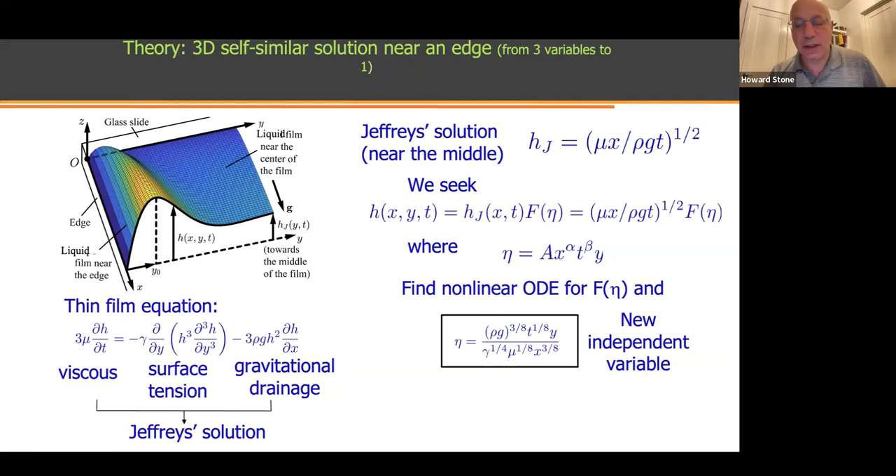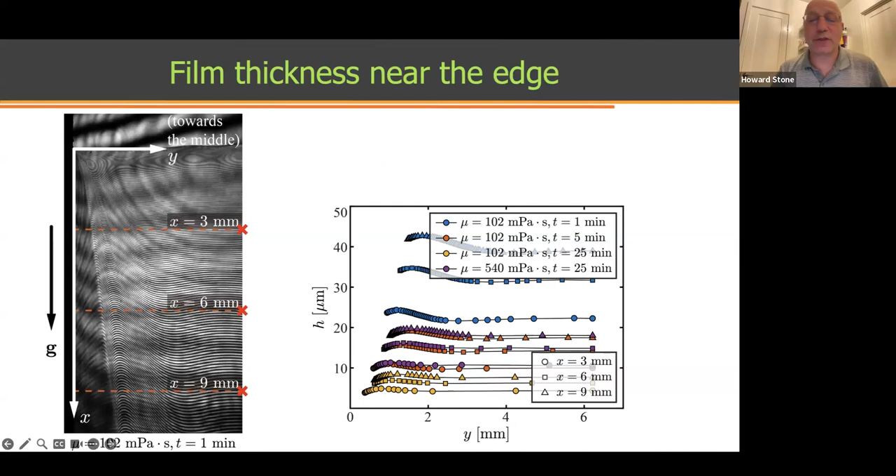So to just show you how this works, I showed you this data with 12 different curves, film height versus horizontal position for different times and different properties. If you now scale the height by the Jeffreys solution, x over square root of t, and scale the horizontal dimension by the similarity variable, all the data collapses to one curve, and a numerical solution to an ODE roughly gets the feature of the data.

So this is one of the few examples I know where you have a problem with 3 independent variables, but somehow miraculously you can find a solution. And because it has an edge, I've been asking lots of people over the last couple of years, are there other problems with the corner where you might have this kind of structure in some other fluid mechanics like problems, because it was the edge that made this possible.

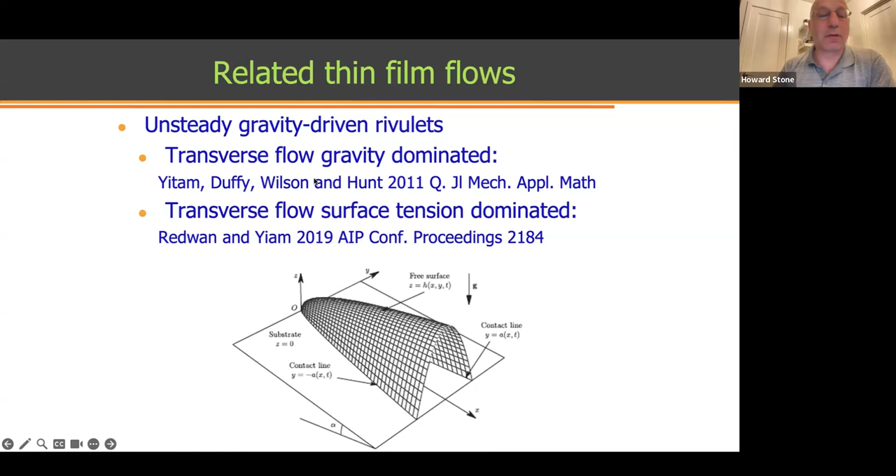Okay, I have a few minutes, so maybe I'll just do one more thing for you. I want to mention, if you're interested in this class of problems, Stephen Wilson in Scotland has a nice paper also showing this kind of idea. But in the interest of time, maybe I'll just show you one feature to start this last topic.

And we have a paper that is under review right now, and it's long and detailed. If you're interested, I could share that with you. It's the idea of surfactant spreading, work done with my postdoc, Fernando Temprano-Coleto. And it has a small feature to it that I think maybe you'll find interesting.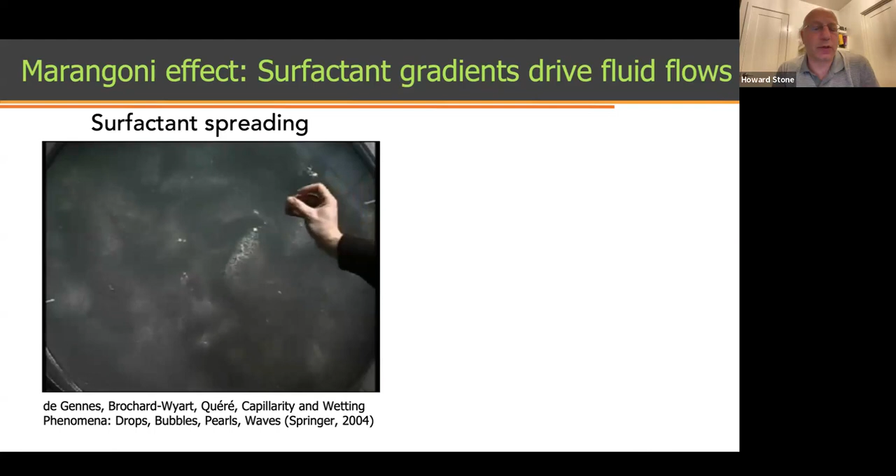Okay, so what we're going to ask is, how do you analyze a problem like that? And we're going to do it in one limit that hadn't been studied as far as we know, or at least, well, it had been studied, but not quite the way we had done it. Okay, so these kind of problems come up lots of places.

Okay, so the problems they had solved were on thin films.

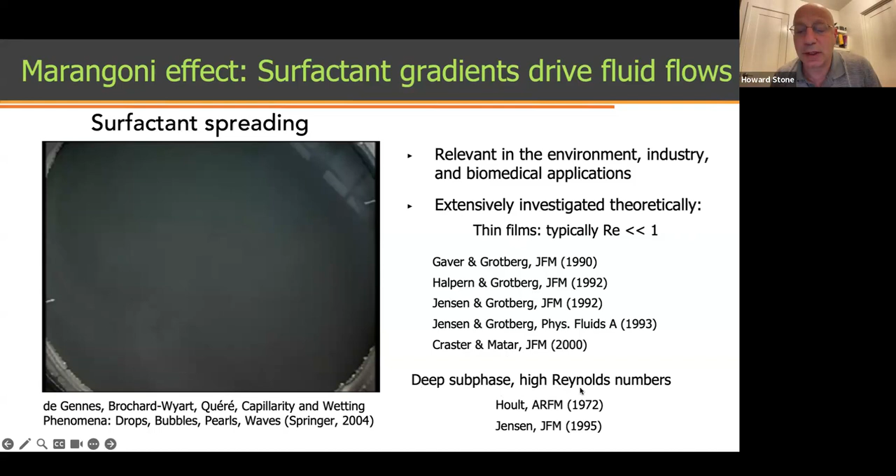There are typical length scales associated with this, like whatever length scale sets your original surfactant distribution. Gamma is the term in physical chemistry for the number of molecules per unit area. It's a surface concentration.

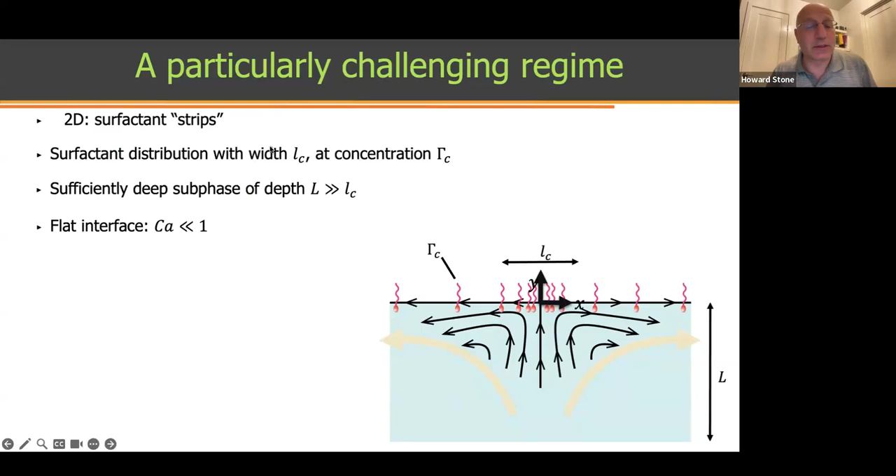If you want to solve this problem, I'm going to assume the interface stays flat. That means there's a dimensionless parameter, the capillary number, that has to be small. And I'm going to assume the Reynolds number is small because that's the limit we decided we'd look at.

If you want to solve for how the surfactant is spread on the interface, you have to solve a convective diffusion equation, where D is the diffusion constant of the surfactant and Us is the surface velocity, which you don't know. But what you can do is analyze the fluid mechanics equations, in this case the Stokes equations.

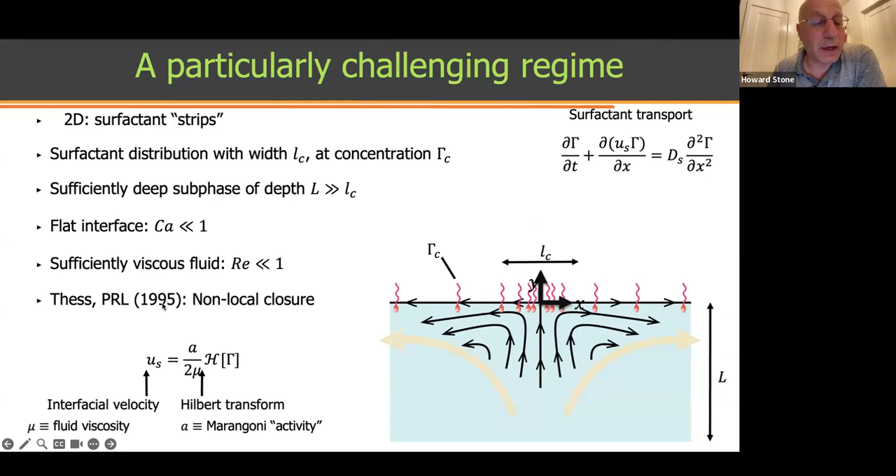This was first done about 20, 25 years ago by a man named Thess, who pointed out that the surface velocity Us is an integral of the surfactant concentration. That integral is called the Hilbert transform, but the analytical solution to the low Reynolds number problem that links U to gamma is shown here.

So these are coupled non-local equations—non-local because to get U you need the entire integral of gamma. Okay, so this is a complicated problem to solve.

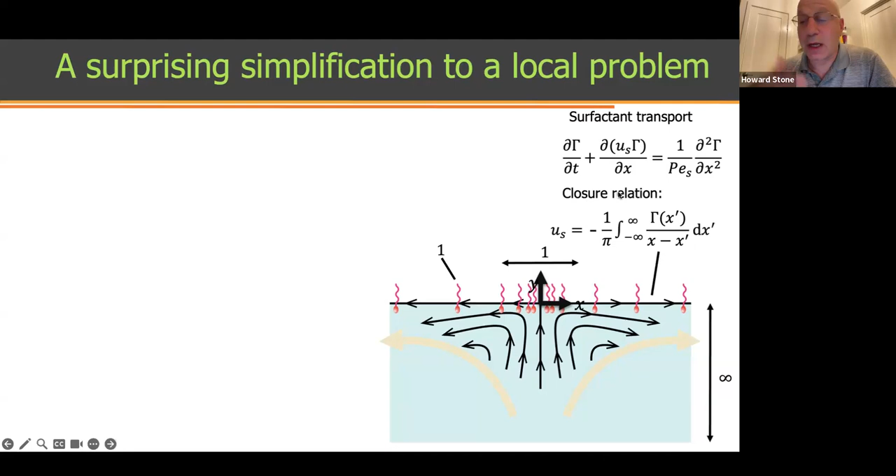What happened a few years ago was a big surprise: Darren Crowdy showed that this coupled non-local, nonlinear problem, it turns out if you make a change of variables—if you introduce a complex number psi, which is the velocity plus or minus i times gamma. Darren chose plus, we've now done plus, but we originally did minus. Mathematically, they're the same for this problem.

If you introduce this complex function, it turns out these two equations become the Burgers equation for psi. It's sort of miraculous—it looks like a local equation. It's exactly the feature of Burgers equation.

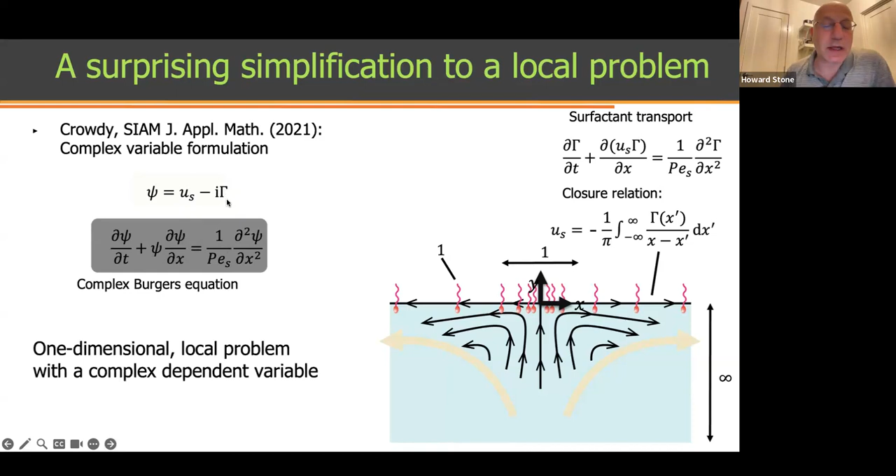It has one non-dimensional parameter, which is a Peclet number. The real part of psi tells you the surface velocity, and the imaginary part of psi tells you the surface concentration. This problem had been studied in a couple papers by Darren and a group in France, and they found problems where they could develop exact solutions.

Two years ago at the APS meeting, I was reading the paper by Bickel and Detcheverry, and I started to talk to Fernando, my postdoc, about not finding exact solutions to this problem, but might there be similarity solutions that are quite generic?

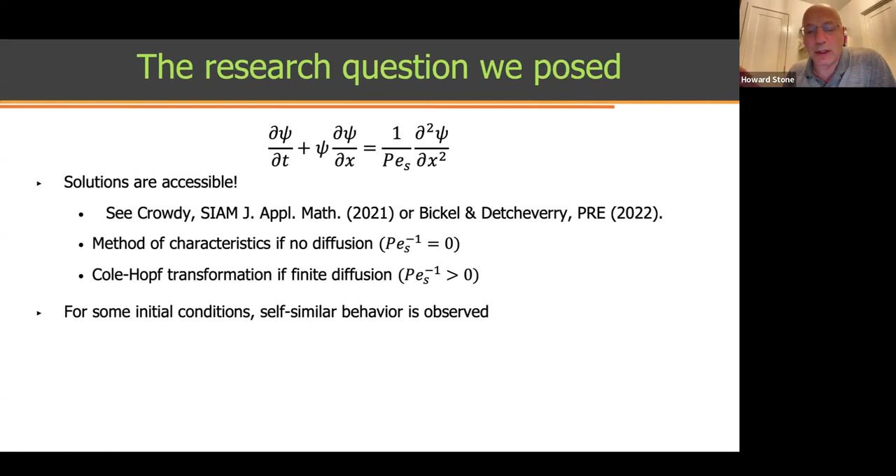So we went on a hunt for trying to find solutions to this coupled flow and surfactant problem that had the feature that we didn't care what the initial data was, but wanted to know at longer times: are there self-similar solutions? Suffice it to say that I'll skip the details—there are, and I'll just show you the idea. Fernando would explain all the details to you.

But imagine you have a surfactant distribution—this is my last slide, by the way, other than the conclusion slide. Imagine I have a surfactant distribution that's sort of localized in a region. It sets up a velocity field which is zero far away, but is moving to the right of it, and moving to the left of this center. Then if you numerically solve this equation, you get a spreading front.

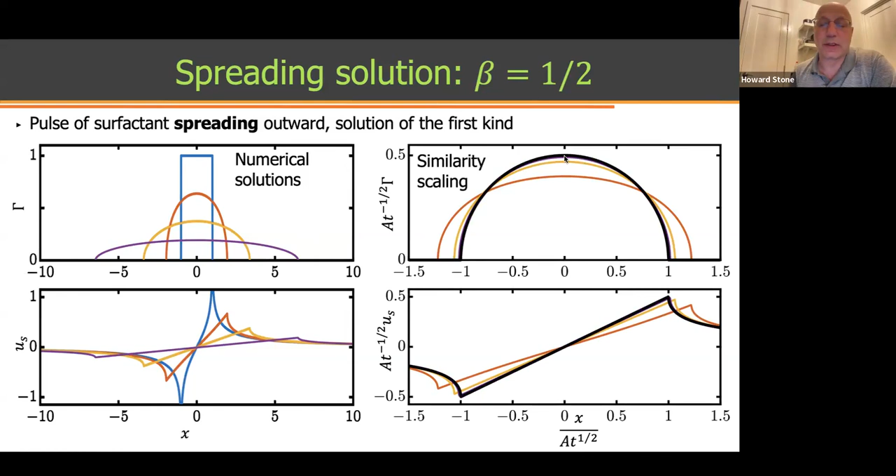It turns out the similarity solution for this problem shows that there's a scaling for surfactant concentration and velocity that maps all of these curves nearly to the same curve, this purple curve at late times. The similarity solution that you find analytically, the black curve, picks it up nearly exactly. So again, the same kind of ideas start to happen, that you can find scalings and reductions through this idea of self-similarity. In this problem, the details are much more complicated because of the two features: the fact that it's Burger's equation and the fact that you're dealing with a complex function.

Okay, so I'll skip the last thing and just say I'm glad I had the chance to talk to you. I realize my time is up, but I've shown you a number of different problems, or at least tried to sketch different ideas. Here there was a common theme of self-similarity, but the beginning of the talk started with some different things that we had been doing at higher Reynolds numbers. With that, I'll be happy to answer some questions.

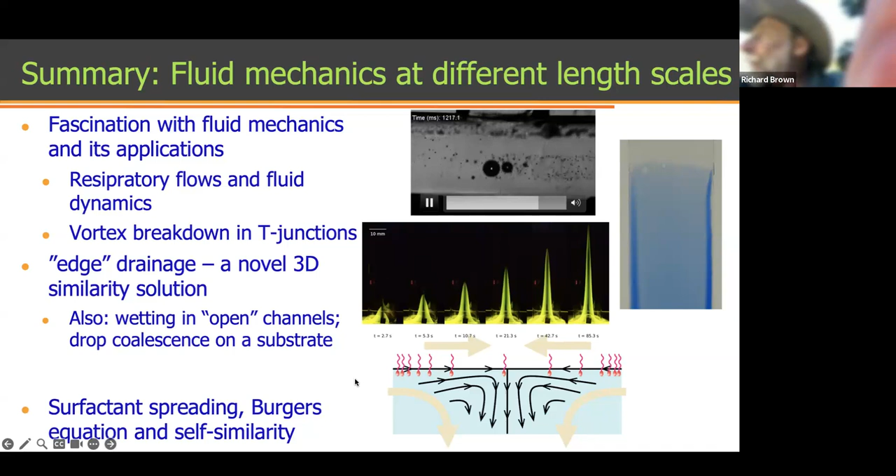I can say we have a different project in my group with a researcher I work with, Maximus Hertscher, where we look at sprays and the aerosols produced in different spray processes. We understand something about the drop size distribution that comes from that, from first principles. Because the drops are so small due to a novel way that Max makes them, the droplets dry quickly to make powders. So we have a research arm and a little technology we're working on there. But with respect to COVID, I guess I can say two things.

One, I didn't put this in the video, but early in COVID—oh, it's embarrassing, I've misspelled respiratory on my slide—you would read about where aerosols come from. My reading of the literature prior to 2020 was that people said the droplets either come from deep in your lung or the upper airway. We all have friends that when they talk to us, spit on us.

My colleague Manouk Abkarian started to image, in his home actually in a closet, in a dark room with one light and his iPhone, what comes out of your mouth when you're just speaking. There are lots of small droplets you can see that are likely being formed in your oral cavity and at your lips. We wrote a paper documenting how, when your lips are wet, as you open them, threads are effectively formed. As you breathe out, they stretch the threads and then break into droplets of many different sizes.

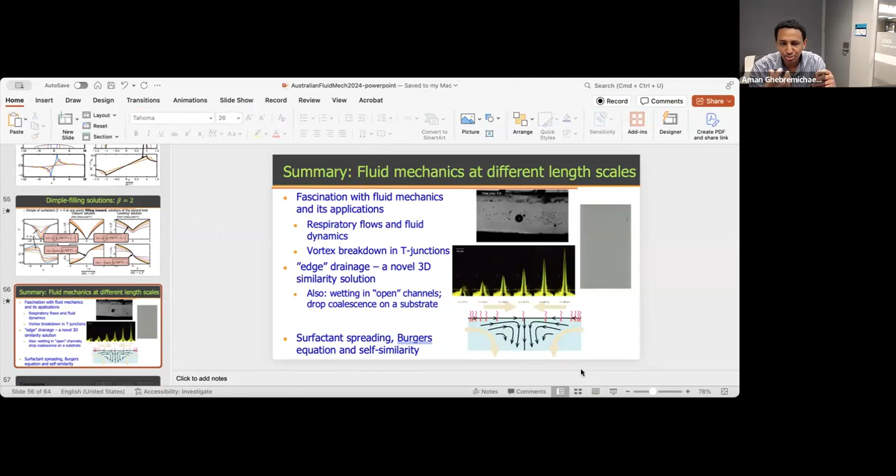Yeah, it's a great question. Is the size or the density important? What matters for this trapping, as far as we can tell, is the density difference between the particle and the fluid. The particle has to be lower density to get trapped inside the regions of vortical flow. We did some experiments with hollow particles, and we tried to understand the density difference needed for trapping from 3D numerical simulations. But everything is controlled in this case by the density difference.

If the particle is more dense than the surrounding fluid, then as it tries to follow a streamline moving in a circle, it's like a rock on a string, so it's pushed away from the center of the vortex. The vortex is created by the high Reynolds number flow and the geometry, which curves the streamline. But if the particle density is less than the surrounding fluid, the trajectory is towards the center of the vortex. In our original paper, I think we estimated a density difference of about 0.7 that of the surrounding fluid was sufficient to not only get pushed towards the center of the vortex, but remain trapped as particles circulating in the vortex breakdown bubble. But that's sort of an open question - we didn't study it in great care, and I haven't seen anyone do that.